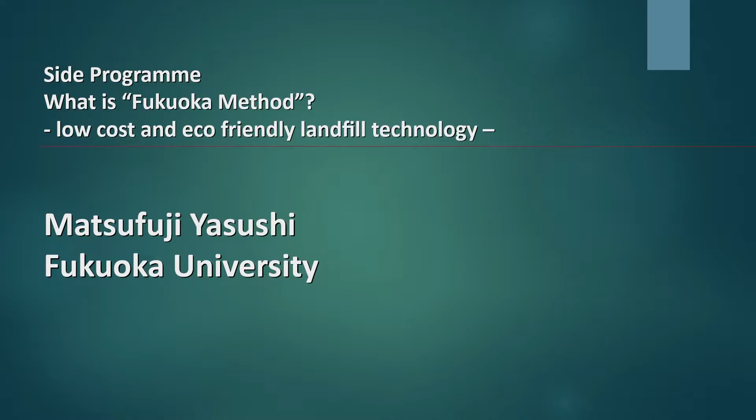Next, I'd like to call upon Professor Emeritus Matsufuji of Fukuoka University. Dr. Matsufuji will talk about adequate technical transfer in waste landfill by Fukuoka Method.

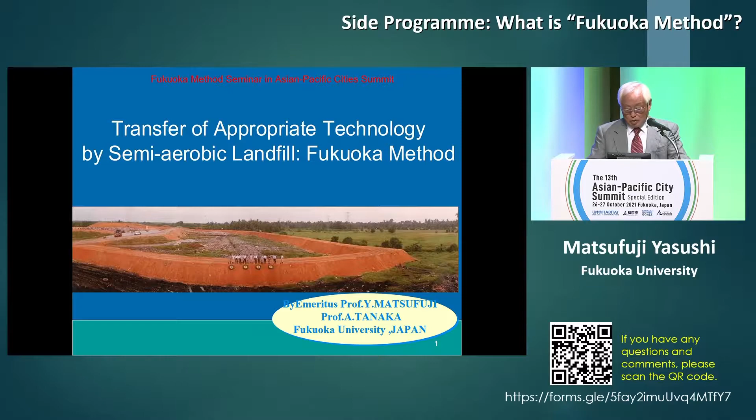So the content of today's lecture is Fukuoka Method of appropriate technology transfer in waste landfills. First of all, before talking about the Fukuoka Method, I would like to talk about the history of the development of the Fukuoka Method and its characteristics and advantages.

It was during the period of high economic growth in Japan from the 1960s to 1970s when scientific initiatives were done for the waste landfills. During that time, there were many pollution problems, in particular in Kyushu, where Fukuoka is located. There were many serious environmental problems there, such as Minamata disease, air pollution, Kanemi disease, and so on and so forth.

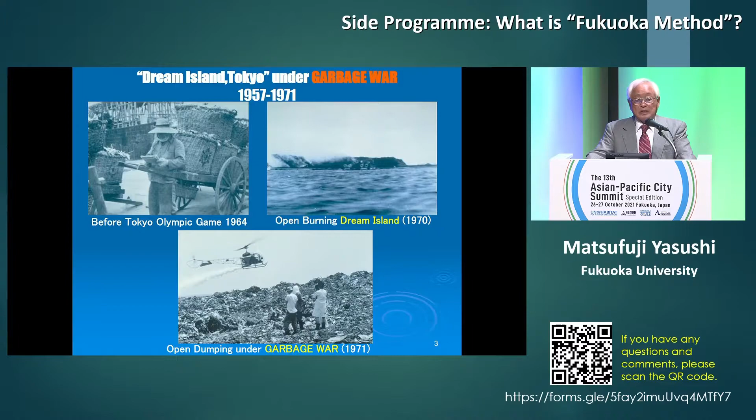As you can see in this photo, in Tokyo, at the non-hygienic waste landfill named Dream Island, a serious environmental problem emerged, and the Tokyo Garbage War Declaration was issued in 1971. It was only 7 years after the 1964 Tokyo Olympics. In Japan, because of this declaration, garbage became the focal point, and it actually triggered nationwide initiatives to do something about the waste or garbage.

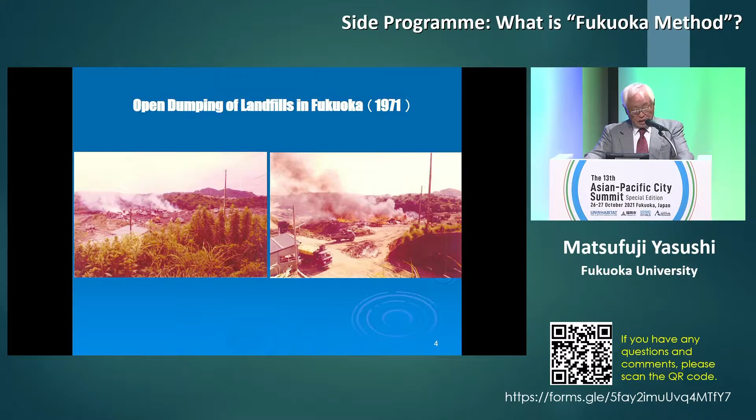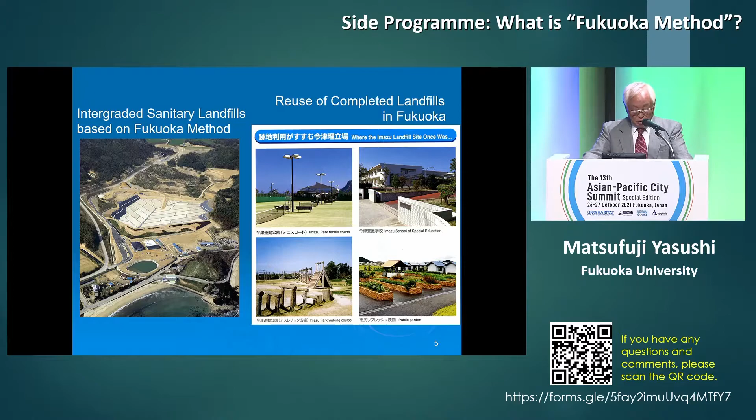The right-hand side picture shows an example of effective utilization of a former landfill site. Again, the site has been highly evaluated by the citizens. If you compare this photo with the one taken in 1971, you'll be surprised to see how much landfill technology has changed in over 50 years.

Next, I would like to explain the characteristics of the Fukuoka Method. The Fukuoka Method is technically called semi-aerobic landfill structure, which is now the standard for landfills in Japan. The advantages of the Fukuoka Method, as you can see in the video, are low cost, simple technology, reduced environmental impact, and greenhouse gas reduction, making it an environmentally friendly and sustainable landfill technology.

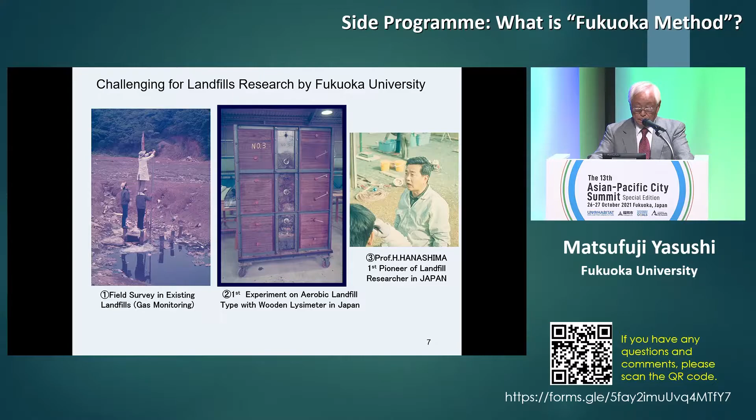Now, let me explain about the Fukuoka Method. In the 1970s, Fukuoka City was struggling with the garbage problem and started joint research with Fukuoka University for the purpose of early stabilization of landfills. This photo shows the field survey of the landfill site, where monitoring has been done. And this is the first landfill experimental device in Japan. Basic research began at that time in Japan.

The experiments initiated by Fukuoka University were aimed at aerobic decomposition of landfill waste, reduction of the pollution load of leachate, and stabilization of the landfill. This is in fact a national project, shown in the photo, from the Ministry of Environment, which consigned us to do this test. In the process of the test, this new method came about, which is known as semi-aerobic landfill structure. Now we call it the Fukuoka Method.

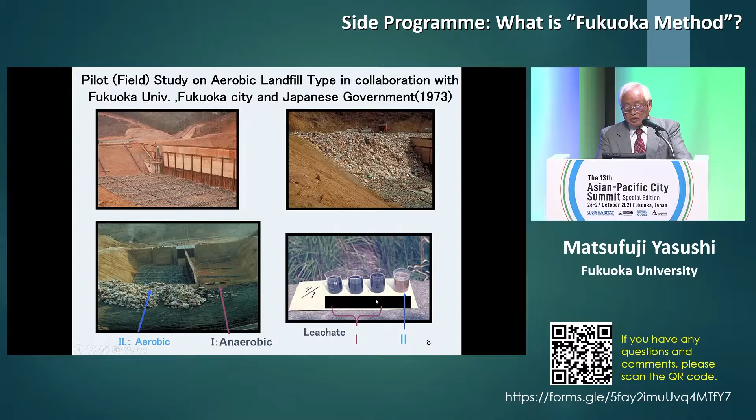At the right bottom, as you can see, good quality water is produced at the end. The Fukuoka Method is technically called the semi-aerobic landfill type. It was developed in 1975 by Fukuoka University and Fukuoka City. This diagram shows the characteristics of the structure of the method.

Leachate collection drainage pipes and gas vent pipes are installed at the bottom of the landfill to quickly remove the leachate from the landfill and to supply fresh air from outside the landfill to inside the landfill. By this, microbial fermentation takes place, and heat from the microbial fermentation is generated.

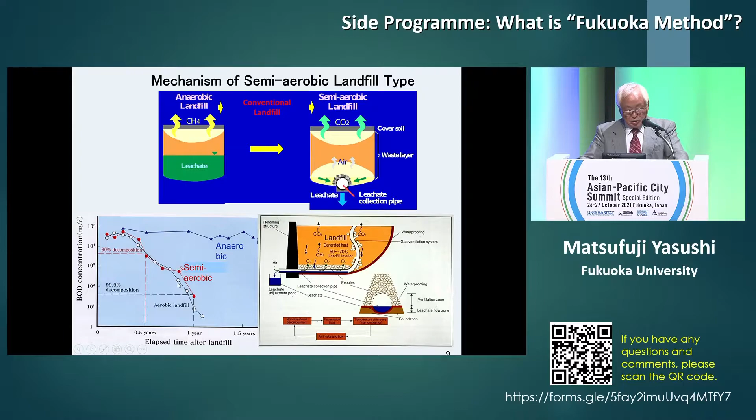In comparison with the conventional anaerobic landfill structure, aerobic decomposition is promoted in the landfill site, and the air is supplied naturally. For BOD, at the left bottom, you can see the blue line and the red dotted line; leachate of better quality, by one or two orders of magnitude, is produced.

Take a look at this photo. Before 1975, semi-aerobic landfill structure was at the level of a hypothesis, but Fukuoka City built a new landfill based on this hypothesis, shown in the photo, and the landfill site proved the hypothesis of semi-aerobic reclamation to be correct and confirmed the trend of early stabilization of the landfill site.

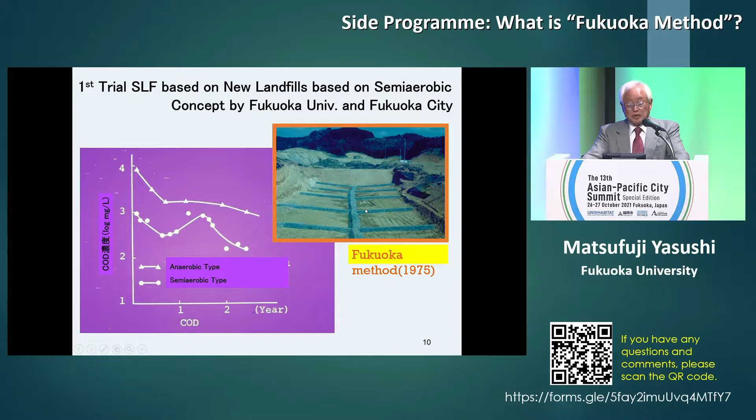As a result, this spread nationwide and is commonly called the Fukuoka Method. In 1981, the Fukuoka Method, or the semi-aerobic landfill structure, was adopted as the official reclamation guideline in Japan.

So the advantages of the Fukuoka Method are, number one, low cost, number two, simple technology, and number three, environmentally friendly. And recently, it is related to methane gas reduction. And so in 2011, the UNFCCC officially recognized this as a new CDM technology. It was born and raised in Fukuoka, and this technology was acknowledged by the UN. So not only the Asia-Pacific region, but Latin America and Africa have also been focusing on this technology.

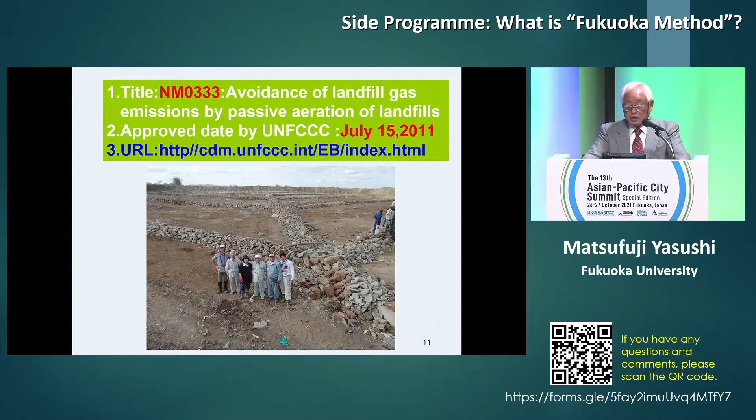So SWAN Fukuoka, Fukuoka University, Fukuoka City and other organizations are working together to spread this technology to other countries. Why? Because of this concept, the semi-aerobic reclamation concept. We are improving the technology to suit various national conditions, weather conditions, topography, and developing countries. And we are also tackling human resource development in this area.

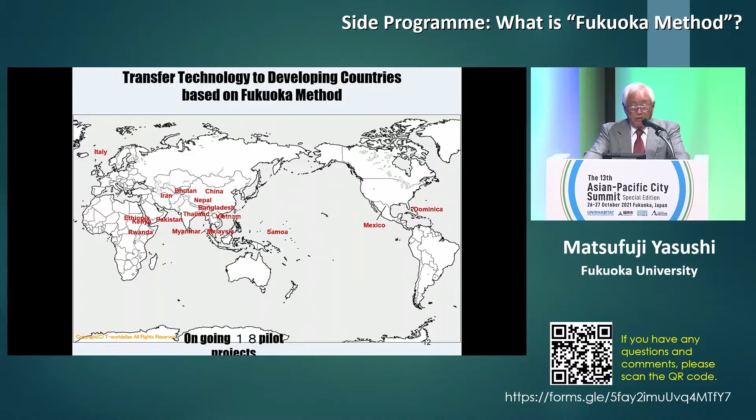Next, I would like to introduce to you an example of Fukuoka method technology transfer. This map: we have been giving technology transfer to 18 countries around the world. Step by step, the Fukuoka method is expanding throughout the world. The first demonstration case of Fukuoka method technology transfer was from 1988 to 1990. I was dispatched to Malaysia as a long-term expert of JICA. This is the first such case.

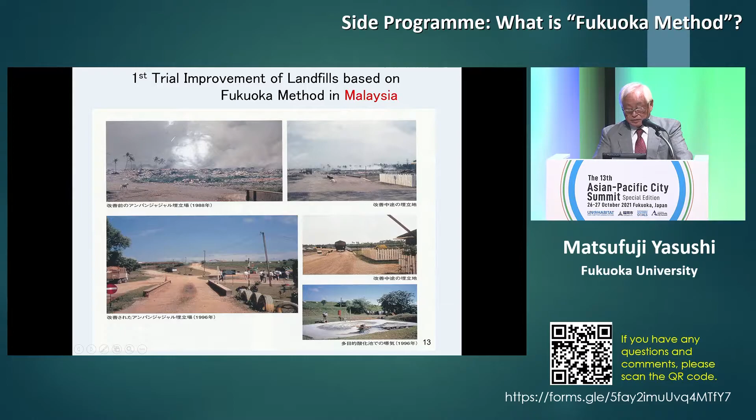As you can see in this photo, quite a typical open-air dumping landfill site was there. By introducing the Fukuoka method, under conditions lacking the 3 M's, no money, no material, no man or human resources, the landfill site was improved step by step through the basic concept of the Fukuoka method using locally available materials. So step by step, you can see the improvement. Within a matter of years, this improvement took place.

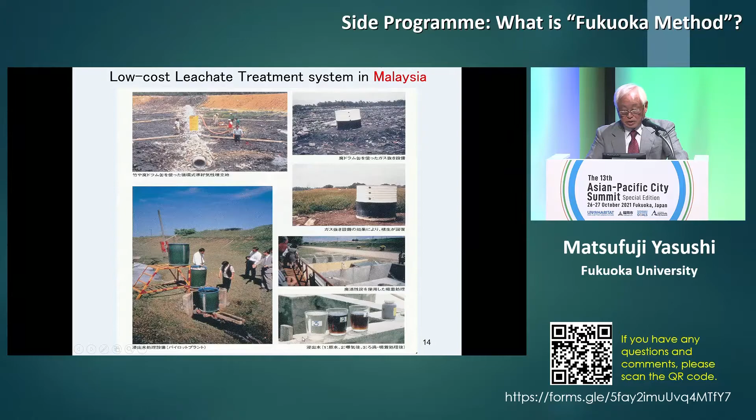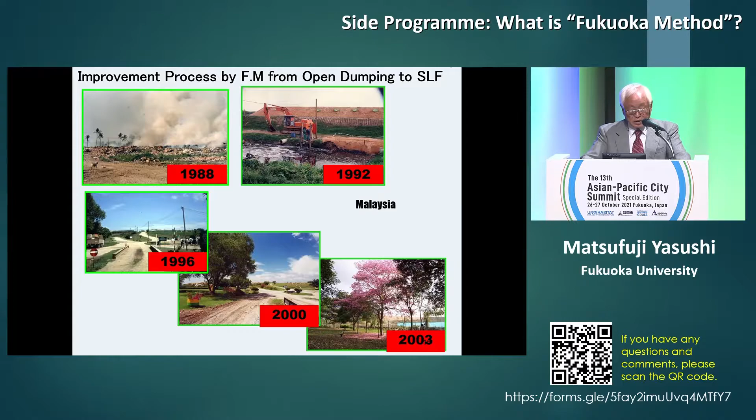In another picture, we used bamboo for leachate collection and drainage pipes, and waste drum cans were used for gas venting pipes. The leachate treatment technology was also transferred by reusing locally available waste activated carbon. These photos were taken in Malaysia, showing the progress of the Fukuoka method of landfill improvement. This success case was highly evaluated as a JICA project, and a lot of trainees from those countries started to visit Fukuoka University and Fukuoka City to learn the Fukuoka method.

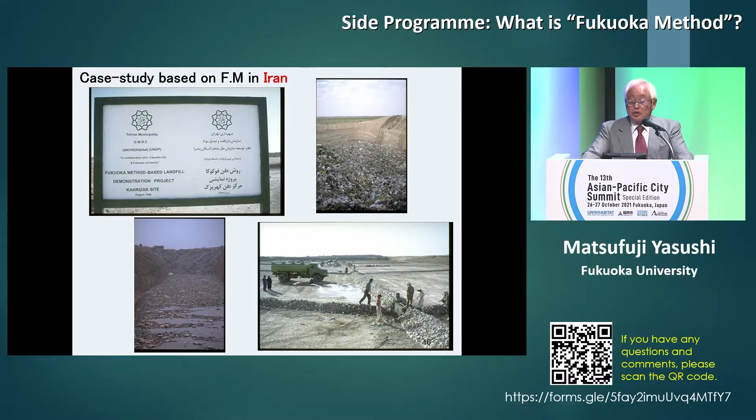As you know, Malaysia is a tropical rainforest country. So the next case is the Tehran, Iran case, a desert area. We worked together with the United Nations Habitat Fukuoka office. A completely different situation from Malaysia. The basic design was done for the desert, but the basic concept of the landfill came from the semi-aerobic landfill concept.

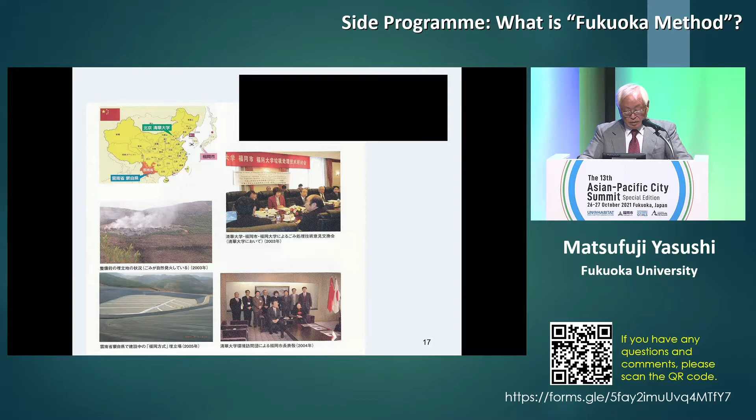Next is China. Fukuoka University, together with a university in China, signed an agreement, and academic and technological exchange of students and teachers has taken place. The Fukuoka method was also conducted in other areas such as Shandong and Yunnan provinces. In particular, academic exchange of graduate-level students has always been quite active.

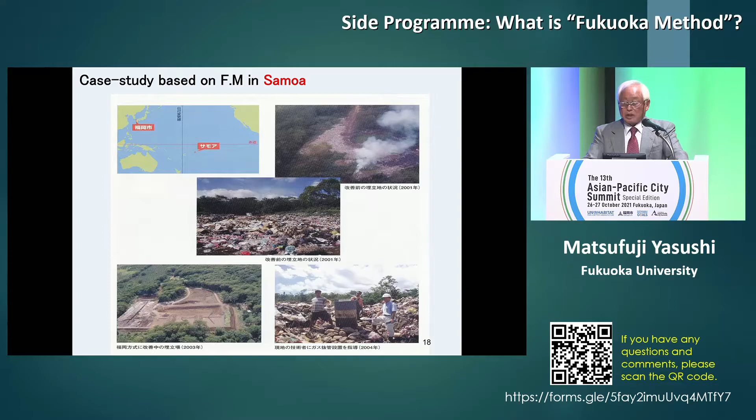Another case is from Samoa. No construction materials; only local garbage and waste coral are used to improve landfills. Triggered by this project, JICA's J-PRISM started, so the Fukuoka method has been increasing on other islands in the Pacific area. The J-PRISM project will be further discussed by Mr. Amano later.

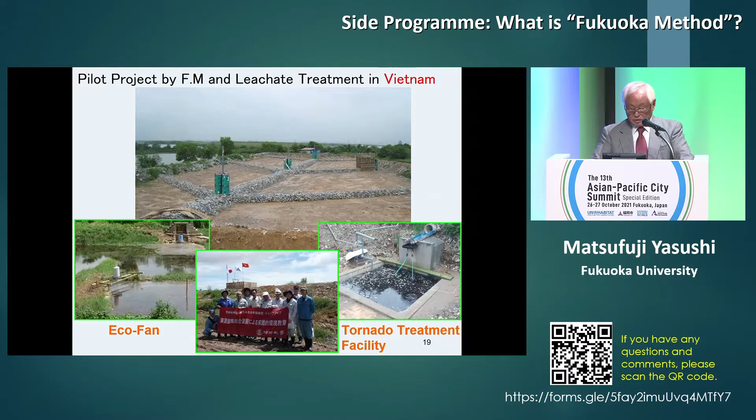The next case is Haiphong, Vietnam, a high humidity area. This program is known as a JICA grassroots project. I worked together with Fukuoka City and Fukuoka University. Here, using the natural wind, quite a simple device called Eco-Fan, an aeration system, was introduced to treat the leachate.

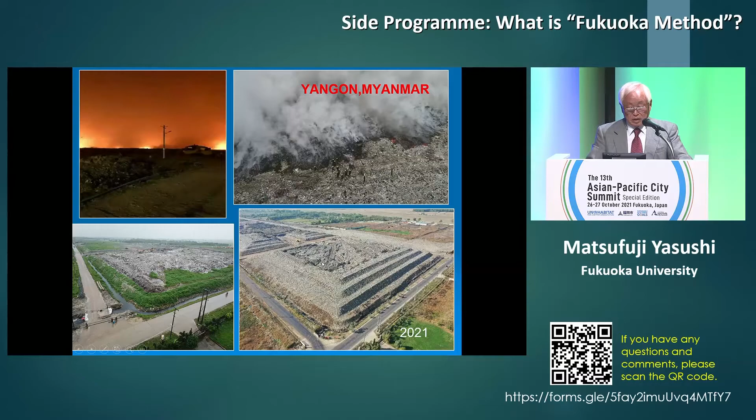So it shows the result of human resource development and the Fukuoka method. Again, they are all highly evaluated. So we looked at the Fukuoka method, technical transfer ideas in the Asia-Pacific region, but in the last 30 years, the Fukuoka method has gradually spread to many countries in the regions in a manner that suits their national needs.

However, there have been some cases where the basic design and construction have been transferred incorrectly, even though they were built under the guidance of Japanese engineers and advisors using the Fukuoka method. This is one example, quite unfortunate, because this is a failed reclamation site, commonly known as a Fukuoka method reclamation site.

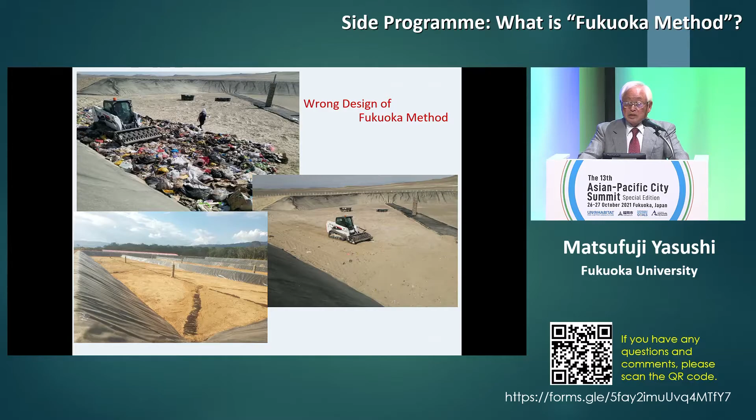Design, implementation, all are wrong, and if this situation continued, the pipe for the leachate may have clogging. Decomposition may not be promoted, and it is going to be anaerobic conditions. So the Fukuoka method is known, but actually it brings about an anaerobic situation, which is a failure case, and this has been a problem not only in Asia but also in Central and South America. I hope Japanese engineers will study more about the Fukuoka method.

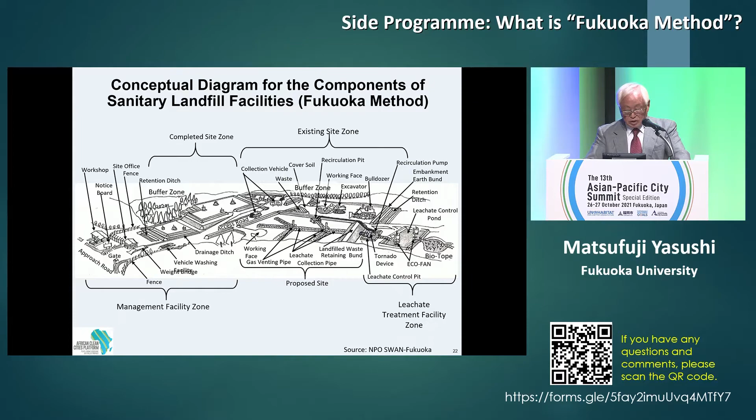So take a look at this photo. Take a close look at this Fukuoka method. It consists of simple facilities that have various functions, and each function is connected organically. Only by doing so can the Fukuoka method be realized. Please take a look at the terminology used for each facility, and please understand its function. Please use your skills and experience and correct or build a proper Fukuoka method landfill.

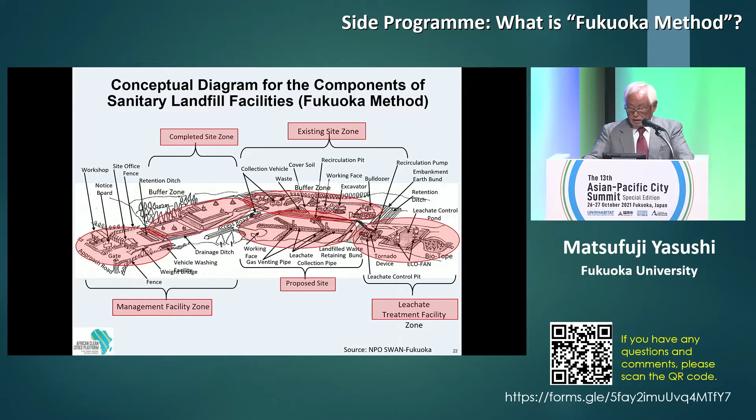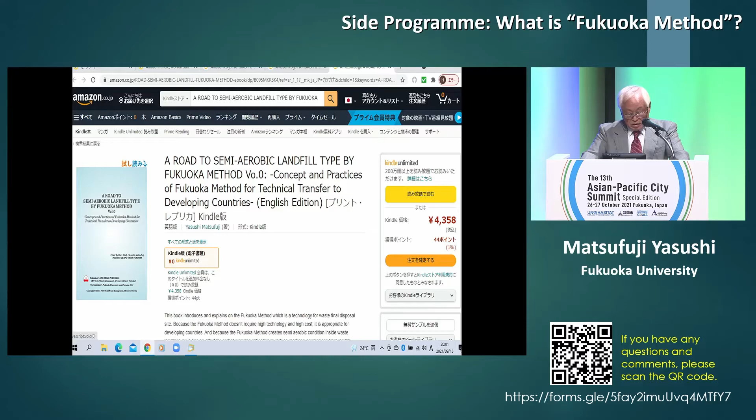And moreover, for those who wish to learn more, last August our group came up with this material, Road to Semi-Aerobic Landfill Type by Fukuoka Method, version 0. Please use it. It provides a detailed explanation of the basic design, daily maintenance, and management techniques for landfill. This text can be obtained through Amazon mail order.

Now, for the last 30 years, as a result of technical transfer, Fukuoka University has been positioned as a base school in the field of waste landfill, or as a training center. Many trainees learned the Fukuoka method not only in Pacific Asia but also in the Middle East, South America, and Africa. So respond to the needs of today.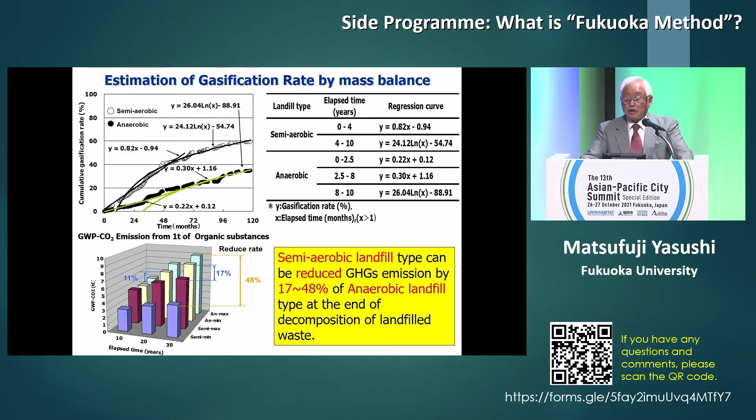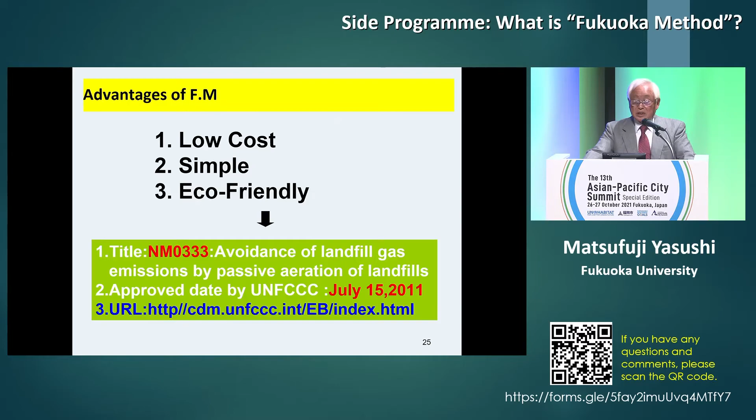The prediction of greenhouse gas emission has also been researched by Fukuoka University research staff. This is just a part of the diagrams. By using the semi-aerobic landfill type compared to the anaerobic landfill type, GHG emission was reduced by 17 to 48%. And as a result, as I have mentioned, the UNFCCC recognized the semi-aerobic landfill type as a new technology for CDM in 2011. Recently, this Fukuoka method is gradually attracting international attention as an effective landfill structure to reduce greenhouse gas.

Time is almost up, so let me summarize. The Fukuoka method, which is a semi-aerobic landfill structure, the very basic concept is here. If the landfill site is aerobic, it not only has a function of dumping waste, but also a function of treatment. The advantages are reduction of pollution load, reduction of methane gas, early stabilization of the landfill, and promotion of reuse of the site. Furthermore, the technology is low cost, simple, and environmentally friendly.

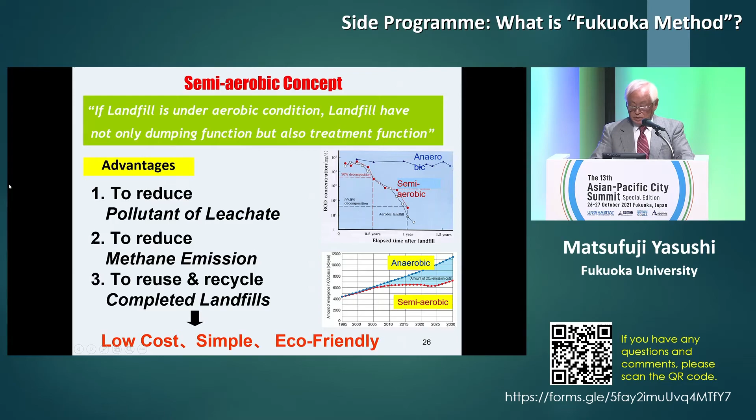It has been highly evaluated, and this figure shows the reduction of leachate BOD concentration and greenhouse gas emission from the semi-aerobic landfill structure compared to the anaerobic landfill structure. Finally, I would like to explain the future direction of the Fukuoka method. Take a look at this diagram, please.

This is a schematic diagram to compare the internal structure of the human body and the landfill. We are working day and night to make the function of the landfill as close as possible to that of the human body. In other words, we assume that the landfill is a living thing.

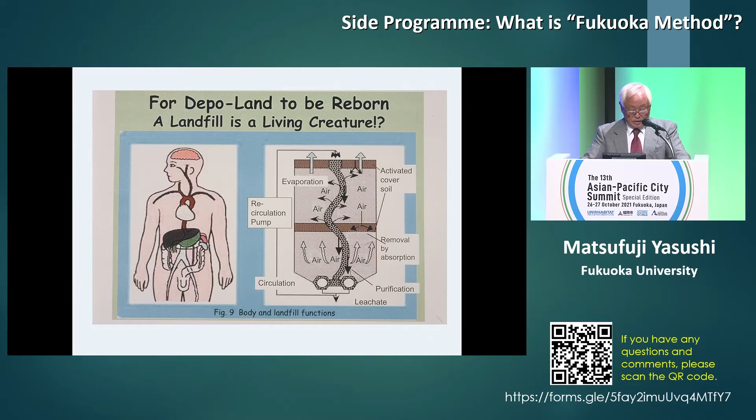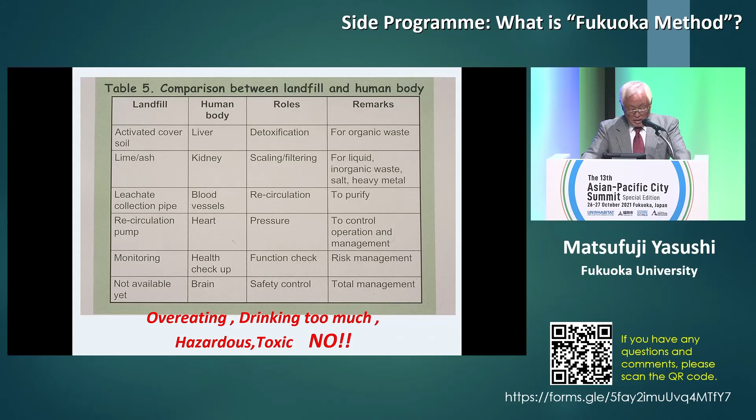This chart compares the functions of organs in the human body with the functions of the major facilities in landfill. At present, the function of landfill sites is still in the middle of the road, but the Fukuoka group has been conducting research and development day and night with a dream of challenging the unknown and bringing the function of Fukuoka-style landfill sites closer to those of the human body. Every day is a day of challenge.

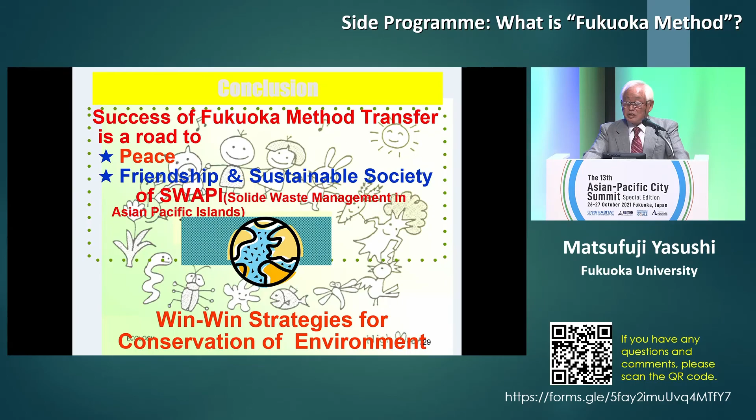So all of you today understand that the landfill is a living thing. If you think that way, you'll be careful about eating too much, drinking too much harmful substances, poisonous substances, and not only technology, but the 3R activities, SDG activities. That's what we need to create a city with those activities.

This is the conclusion of today's online seminar. The success of the Fukuoka method technical transfer is a path that will lead to peace, friendship, and the building of a sustainable society between our cities and those of you participating today. This path is also a win-win strategy to protect the environment. I hope that all of you participating in the Asian Pacific City Summit will take on the challenge of building peace and SDGs together.